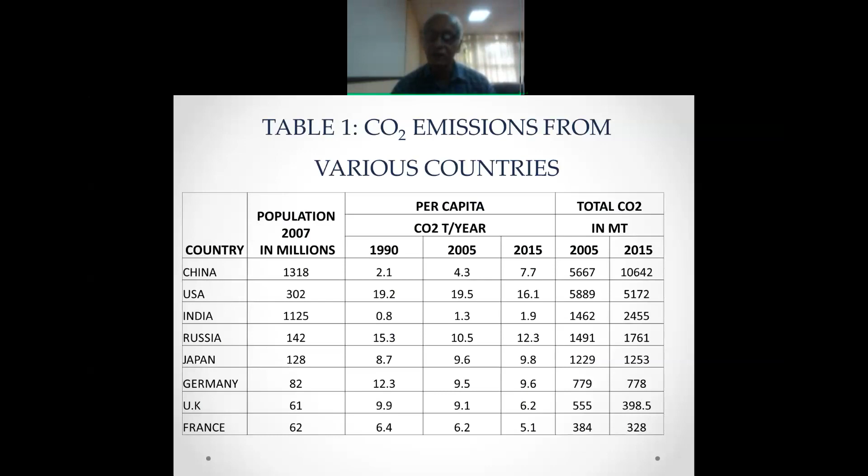Later on, after about 1989 or so, serious dissemination of the technologies developed by us was started by Dr. Yogananda, who was my student earlier. I will share what happened after the institute research in the second presentation. The first one is building alternatives for housing. I have a few slides about energy and carbon emission, which I shared the day before yesterday, so we will skip some of these.

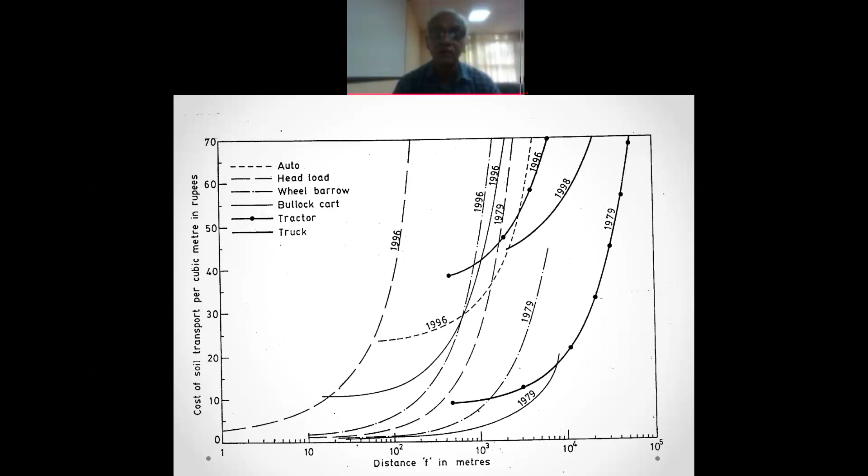India has carried out experiments in soil cement work since 1948. Surprising. In 48, in Karnal, it was then in Punjab, today it is in Haryana. 4,000 houses were built for refugees because these refugees came from Pakistan. Immediately they had to be housed. Bricks were not available. You see, brick production takes time. That was the season. In the rainy season, you don't get brick production. So they had to put up buildings.

And then the Building Research Division of Punjab was doing research both in Karnal and Lahore. And one Mr. Mehra, who was the research scientist, suggested we could use stabilized earth, rammed earth block walls. These walls are made out of ramming soil and cement mixtures, 2.5% cement. 4,000 houses were built. Even now, there are houses in which people have been living.

But the surprising fact is, after this, nobody took a second look at this technology. Maybe because of the use of mud. We were fascinated by concrete at that point in time, so mud was not considered very attractive. And the houses were given to refugees who had no other option. So to that extent, people didn't think much about this. And more or less, this was the end of this technology. You can say infant mortality of soil cement technology. Although we started 73 years back, we didn't improve upon it.

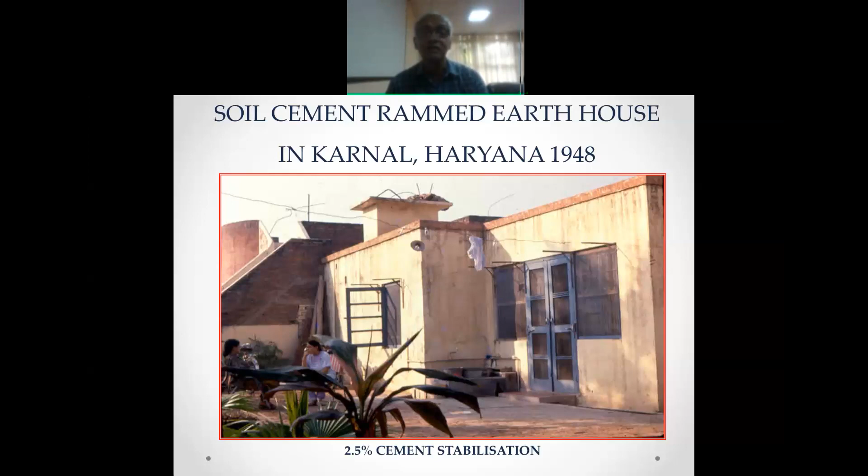Bangalore was also a pioneer. In 1949, there were stabilized mud block houses. 260 houses were built by an engineer by the name R. Madhavan. He made use of wooden moulds and hand rammed soil cement, 5% cement, to make blocks and then built walls out of this. Even now, there are 6 houses near Krishna Flour Mill.

The walls are not great. You can see a little bit of plastering at the base. Otherwise, there is no plastering. It is all whitewashed. And the 6 houses near Krishna Flour Mill are performing reasonably well, in spite of the fact that the blocks were not great. When I tested some of the blocks out of some buildings which were removed, the strength was pretty low. But this was also an experiment which did not excite interest among the engineers.

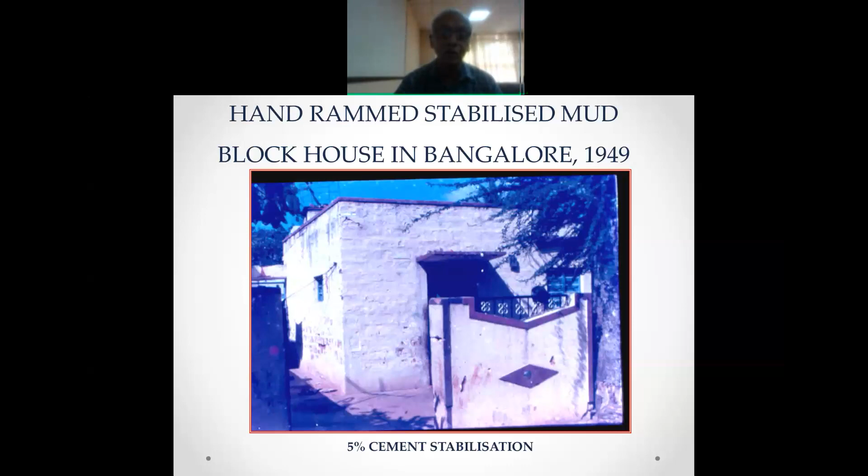And Mr. R. Madhavan, his name has been given to a park in Jayanagar, so that you can forget about what he has done. Like we forget about Gandhi by putting his picture on all the notes, and then we do not follow what he said.

Later on, we built one building using a machine called CINVA-Ram, which was imported from Colombia. And we designed our own machine, known as the Astram, in 1979. We were demonstrating this in a rural area in a village called Ungra. It's myself there along with the joint director, Dr. Ram Sheshan, and my younger colleagues, Venkatram Reddy, are all here. He has now retired.

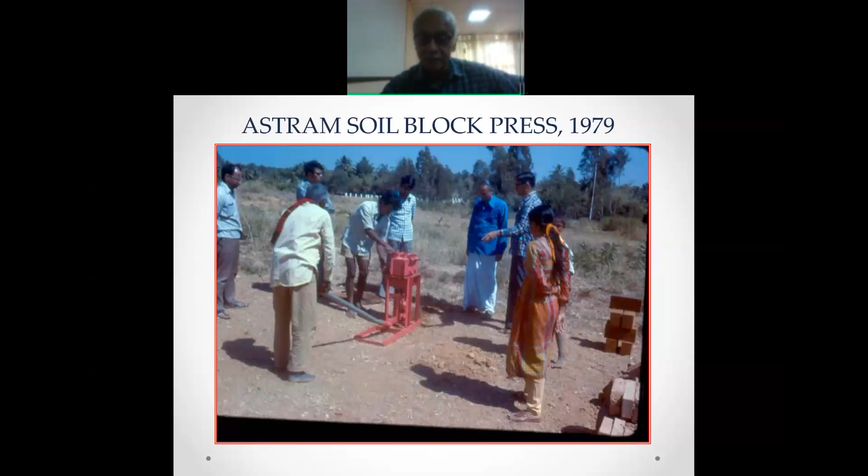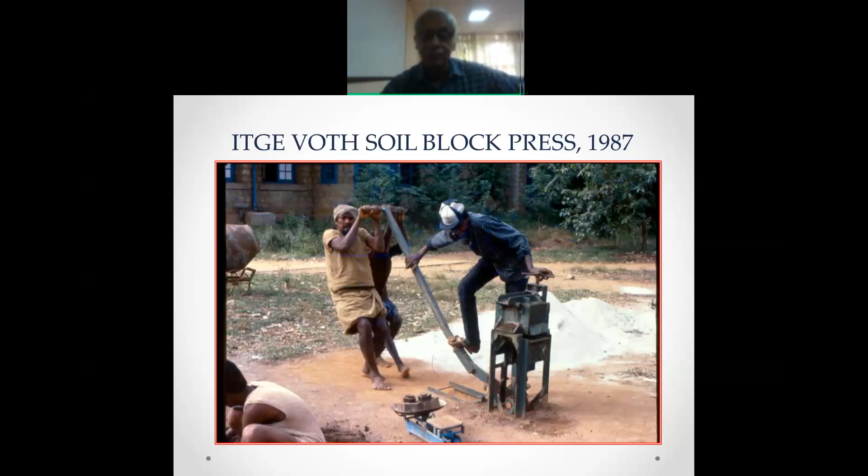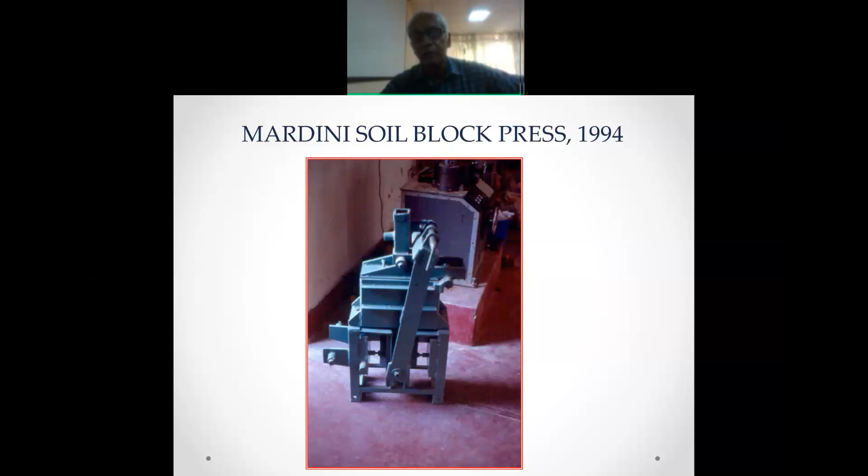This is the latest machine, 94, developed, the Mardini soil block press. And this is now currently manufactured by a company called Mahimaya. And more than 1,000 machines have been produced and sold all over India and even in countries abroad.

In 2018, all the other machines were manual. A human being had to press the block using a toggle lever, a compound lever. But we also developed a mechanized press using hydraulic press, electrically operated. This was developed by Yogananda and his associate Arvind.

Because very often these days people find the pressing using the toggle lever a little tiresome. Many people would prefer to use a machine, and we also try to develop such machines. They are a little more costly and they need the use of electricity. There are advantages and disadvantages. The manual machine could be used anywhere where you do not have electricity, and it generates employment.

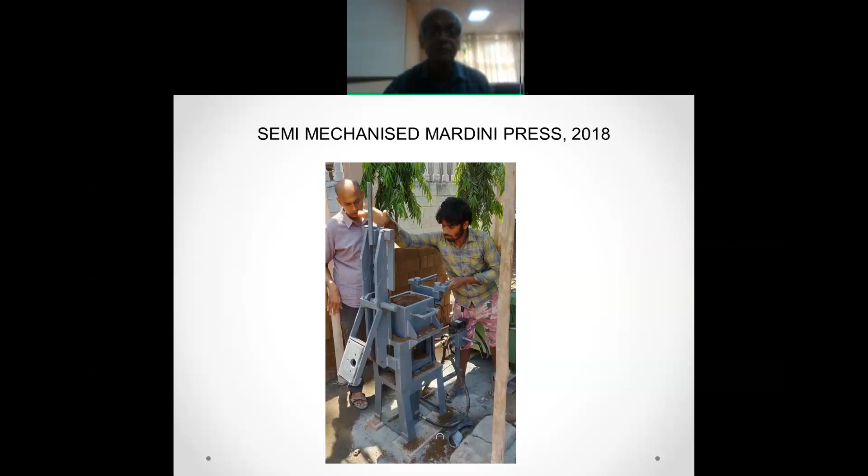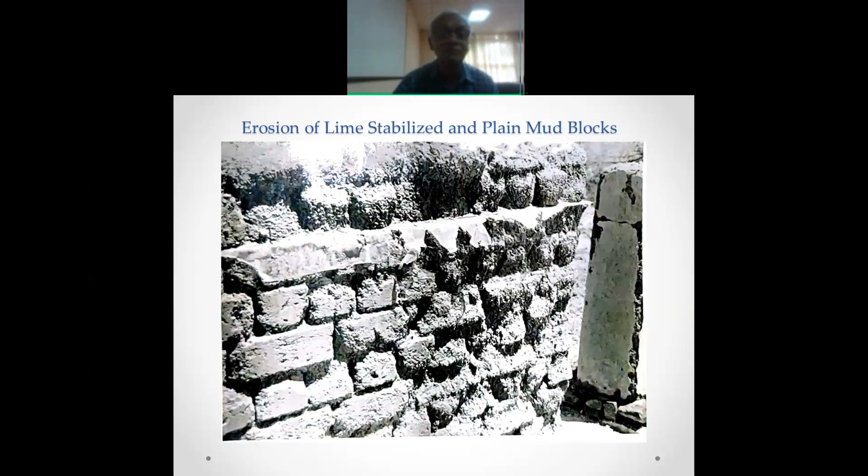Now, I was unhappy with the tar coating I had given because the whitewash would wash away and the building was looking very ugly. So I decided I must correct this mistake. I removed the tar completely and invented a cheap local plaster.

Every step we have to innovate. We have to do something where we want to use a local material, we want to save cost. So I used a plaster known as lime soil plaster.

You see, lime mortar would be very expensive. I could have used lime mortar - I know it would have worked again. But lime mortar is a 1:2 mortar, and lime is more expensive than cement. So the lime mortar would be unworkable.

But I added lime to soil and sand. It was probably a 1:3:3 kind of mixture, so lime is only 1/6. So the cost of lime doesn't figure much. And I used this as a plaster.

And you may ask me, why did I use soil? See, when you use soil in the plaster, its ability to adhere to plain mud is improved. So we want the plaster to adhere to plain mud. Cement mortar would not adhere because the properties are so different.

So I invented this cheap local plaster and covered the wall with it after removing the tar. But this plaster was very weak. It would also absorb moisture because it's a 1:6 mortar. So I had to prevent moisture absorption.

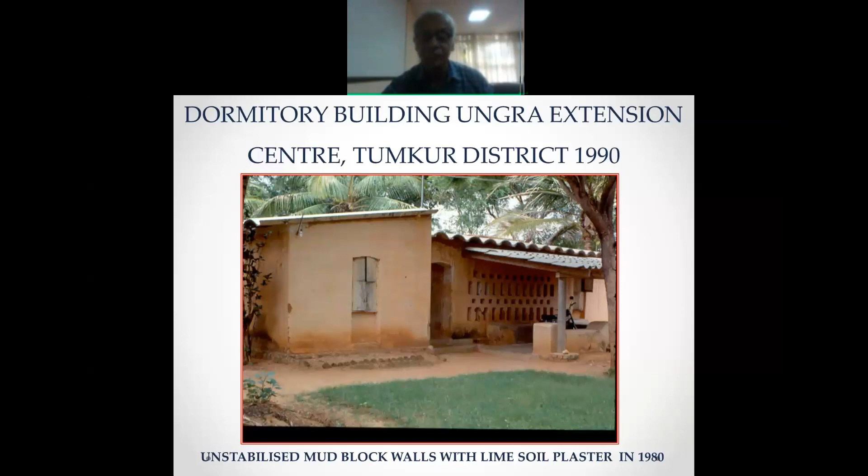We made another experiment because adding a stabilizer would increase the cost greatly. So we wondered, what happens if you make a block with only one portion having this stabilizer? We had lime surki, the local material - brick powder and lime - as lime surki was added.

Our machine was very convenient. We had a separator plate, put stabilized soil on one side and plain mud on the other, and then compacted after removing the plate. Now we have a built-in plaster for the block - it is a block which comes with the plaster. And because of the compaction, the two are held together under great pressure.

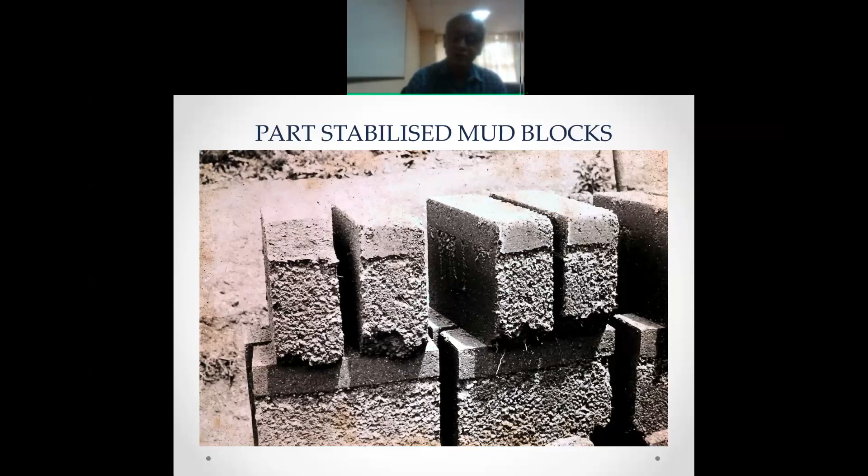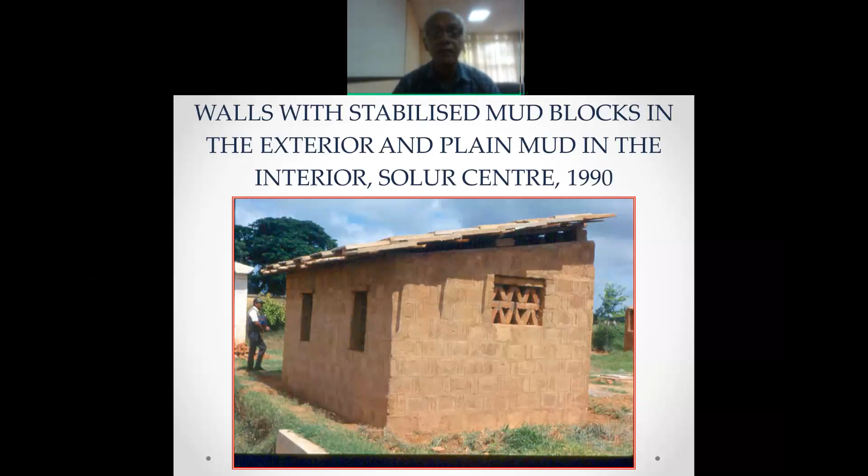So the partner of this paper mill was Mr. Kumangada; my brother was the other partner, and he would not believe in whatever I was doing. But his partner felt this was a good solution, so he got 4 machines made. These 4 machines were deployed there, used the local soil, and made soil cement blocks for the entire paper factory. I suggested the use of 8% cement because I did not know what would happen in an area where the quality control is not clear.

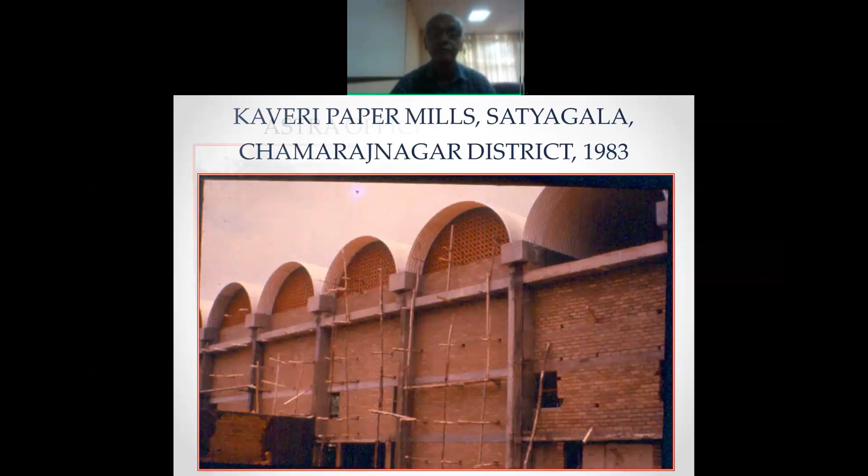And then we had a jack arch roof, a modern version of the jack arch. The traditional jack arch uses a steel girder, but I didn't want to use a steel girder which is so expensive and energy intensive. We made precast concrete, reinforced concrete beams, lifted them and kept them across the walls. Then these arches were made out of weatherproof tiles, 2-inch thick, cast on the ground with GI wire as reinforcement, then lifted and kept. So it's a prefab jack arch terrace.

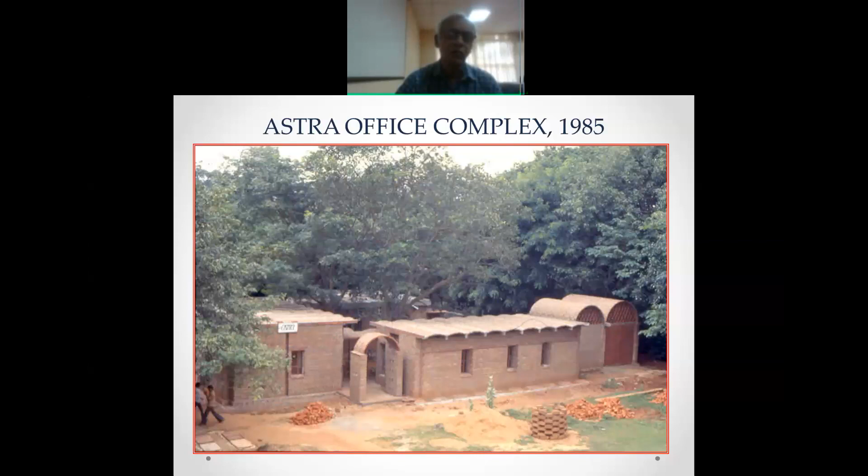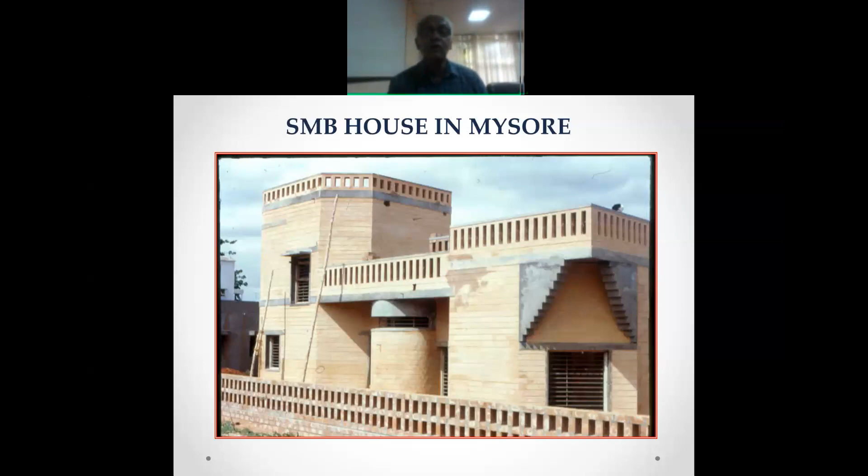This is a house in Mysore, exposed soil cement block work. You can see the variety of experimentation which architects do to display the new material in exposed block work.

In '97, I was living in a single-storied house with one staircase room. My daughter got married and she was living in a rented house. I was wondering, why don't I build my first floor so that my daughter need not stay in rented accommodation? And I could also correct the fact that I was living in a brick house and recommending soil cement. My house was built in '72 when I did not know anything about buildings. All my research started in '75 onwards. And when I built my first floor, I used the soil cement block machines developed by me.

And you notice there is a reddish colored powder here. For this reddish colored powder, I had to remove the surki concrete on the roof. It's about a 4 to 5 inch layer. It had to be removed. When I removed it, a lot of powdery material came, which contains old surki, old lime, sand, everything. So I thought I should use this. And I added this to cement mortar.

You see, I am adding mud, something else to cement mortar to make it better. Because cement mortar sets so fast. You need a mortar which sets slowly. And we added this material which contains surki and old lime, and the mortar setting time increases. You can see the pinkish color of the mortar. So all the waste from the demolished surki concrete was reused. It's an indication of how you can use a demolished building in recycling materials.

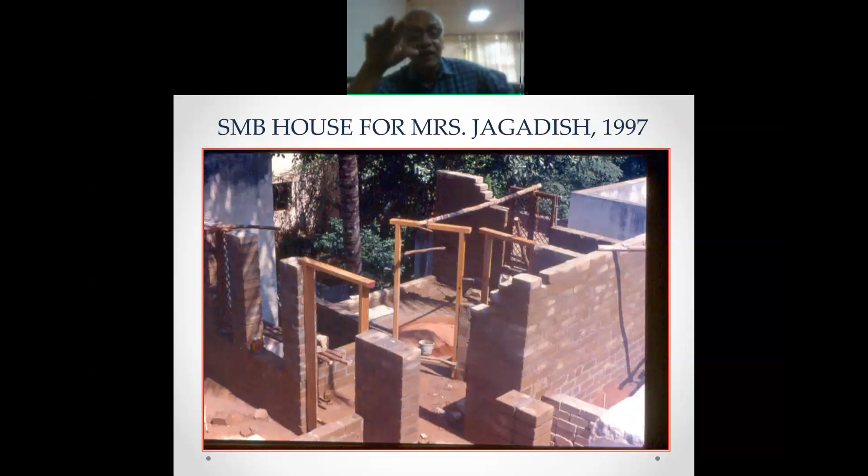And another interesting thing here is we had 4 wall thicknesses in this building: 9 inches, 7.5 inches, 6 inches, and 4 inches. You can vary the wall thickness, which will again lead to better economy.

There was also a major failure. This was the failure in Yelahanka, 1992. The picture was taken in '92, but the problem started showing much earlier. HUDCO was very enthusiastic. After conducting 2 seminars, they said, let us build 700 houses. They wanted to promote the new technology. And they asked the Karnataka Housing Board to build 700 houses in soil cement.

And then I'm not sure how well they compacted the blocks. The machine was also their own copy. And the result is the walls started deteriorating. The kind of experience we had earlier in our office building in '85 was reproduced here because they did not consult us. They more or less stole the technology, picked it up from the streets. There are half-baked consultants.

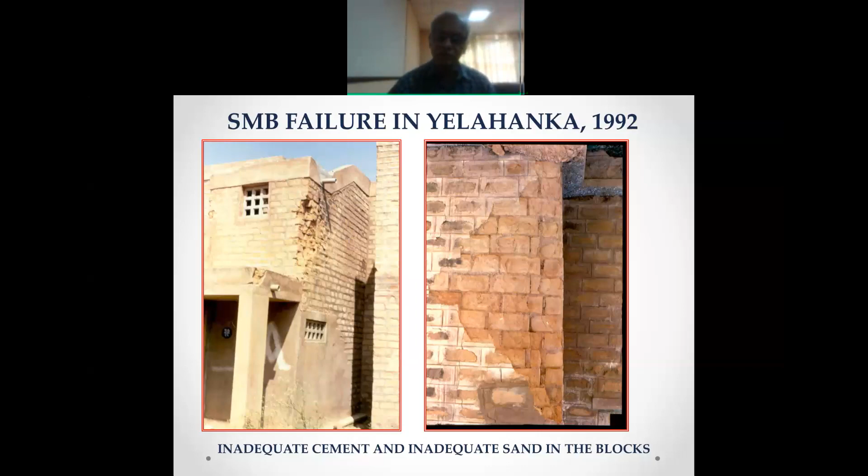The unfortunate part is our engineers do not try to think or try to understand any technology. In fact, the National Housing Bank chairman, Mr. Shastri, who gave us support, told me that government should never build houses. Government building houses is a problem. When the private sector builds, you will find that the houses are excellent. This is a 3-story building in Krishnarajapura, using soil cement blocks, using vaulted roofs, everything possible. No problem with their performance.

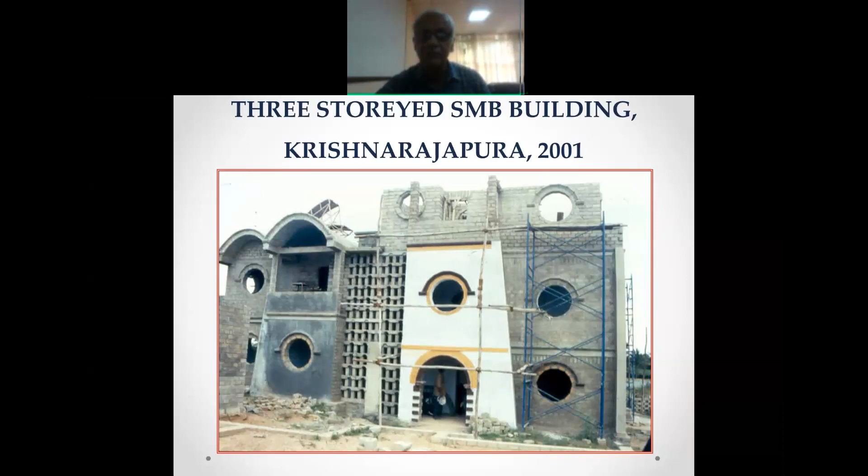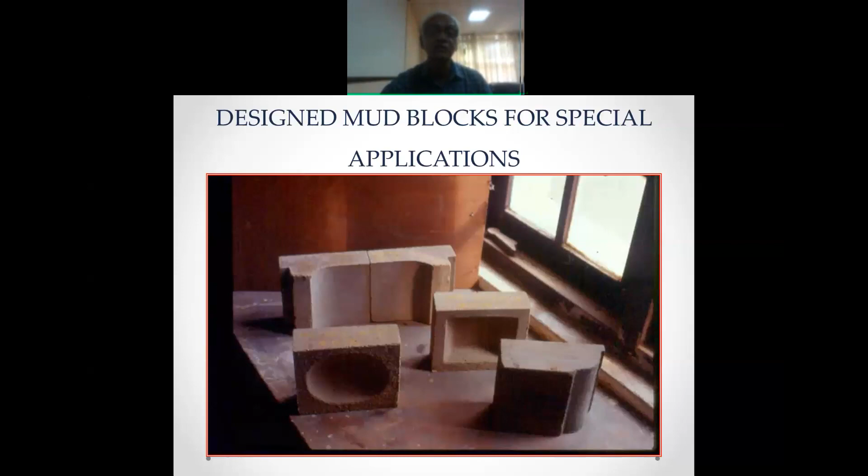You can use blocks of different shapes. The machine has the advantage. You can use this as a decorative block or a corbel. These are blocks used in filler slab roofs with a reduced thickness. So all possible, we did corner rounding earlier. So this technology has tremendous potential in expressing architecturally different forms.

Now, Subhash Basu, an architect who's working with me, and Yogananda came up with a new concept called stabilized adobe. Here, no machine is used. See, the problem with the machine is it is costly and it requires a lot of effort to compact the block. Here, we have a technique using the more or less traditional technique of adobe. Adobe is an unburned brick, but in producing adobe, we do what is known as pugging. Even for burnt brick, the soil has to be pugged. Pugging is stamping on the soil in the presence of moisture so that the clay coats all the other particles and becomes very homogeneous. We did this with a stabilized soil cement mixture. So this was pugged, and then using a special mold whose bottom plate can be removed, we made the adobe blocks of stabilized soil.

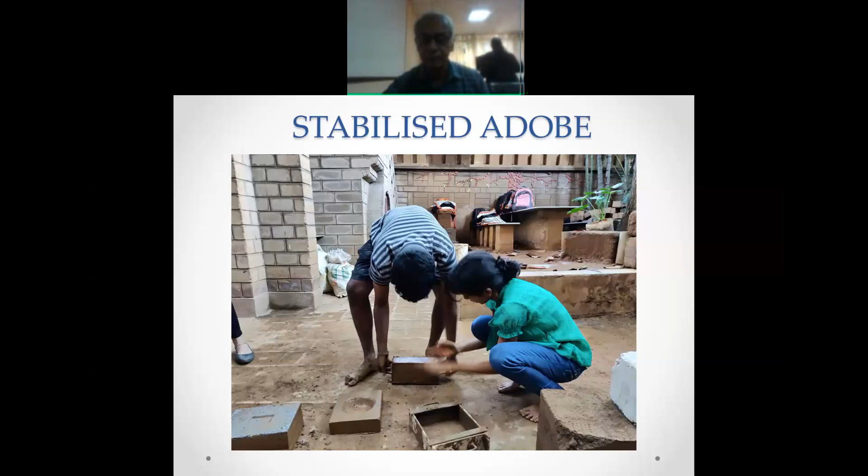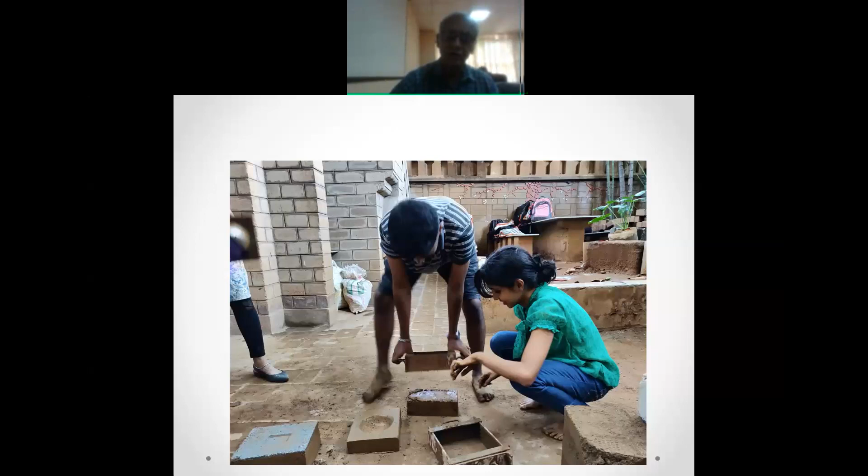And because of the bottom plate which can be removed, it is very easy to extract them. In this technique, the bottom plate is lying on the block, but the mold has been removed. This way, the shape of the block is very good. So, using this technique, we find that it is very easy; in rural areas, people are used to making adobe. They can use the same adobe technology with soil cement and produce blocks for their use. And they can do it after the harvesting. They can make some blocks and keep them apart. In rain, they won't dissolve because of the cement. They can build whenever it's convenient. A fantastic version of soil cement technology, stabilized adobe. Already there have been many houses built using this concept.

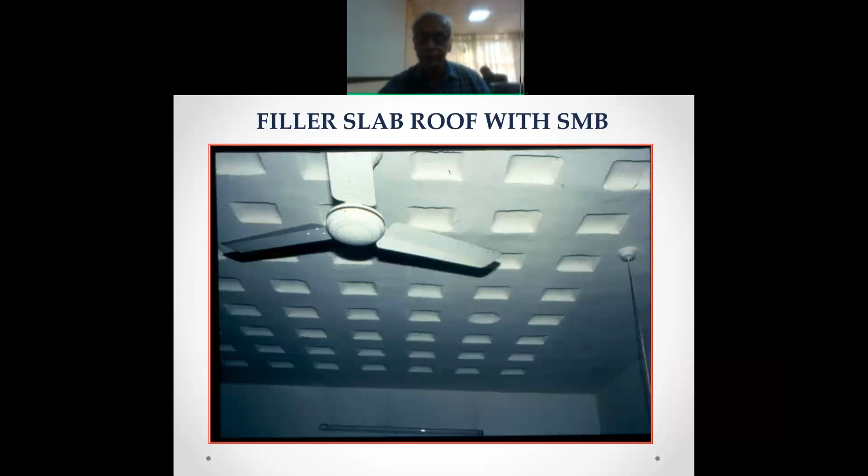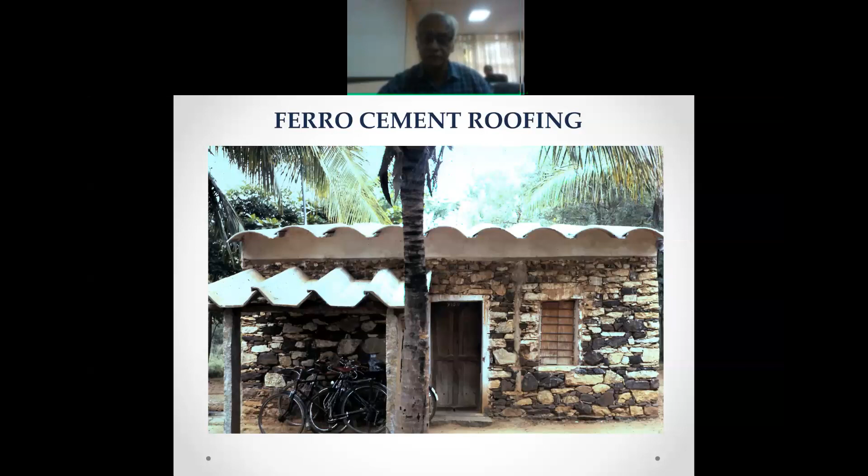After 7 years, I thought the top portion had gone. It appeared deteriorating, but when I tried to remove it, I found the interior was intact. Probably it would have lasted another 4 or 5 years. An interesting solution. Thatch is a cheap material. If you can make it last longer, if it can last 10 to 12 years, so many temporary buildings, roadside dhabas, everywhere, you can save money by using this technology.

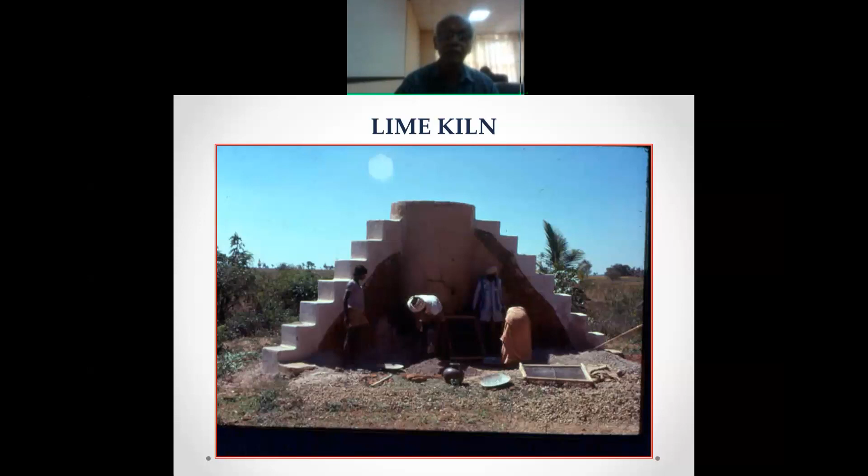It has tremendous possibilities. I showed how the wall can become erosion resistant if they add some amount of lime. And you can use this for plastering. So many possibilities with lime. Lime alone may not give a great deal of strength, but lime, if it is mixed with pozzolana... KRS Dam was built with lime pozzolana mortar. They made pozzolana by burning clay at the site.

Clay burning is a method, but here is an interesting innovation. We used rice husk to burn the clay and made a special kiln with holes in the brickwork because the temperature of burning had to be brought down. If you burn rice husk at a high temperature, it won't be pozzolanic. If you burn it at a temperature below 700, the ash becomes pozzolanic. And burnt clay is also pozzolanic. We produce what is called combination pozzolana.

We make briquettes with rice husk and clay, burn them here because the rice husk is the fuel, and then you grind it to 90 micron fineness. You have an excellent pozzolana produced in the village. In fact, once we produced lime pozzolana cement in the village and sold it to villagers for a few months. Then somebody wanted to improve upon it and pursue it further. It's a great potential even now.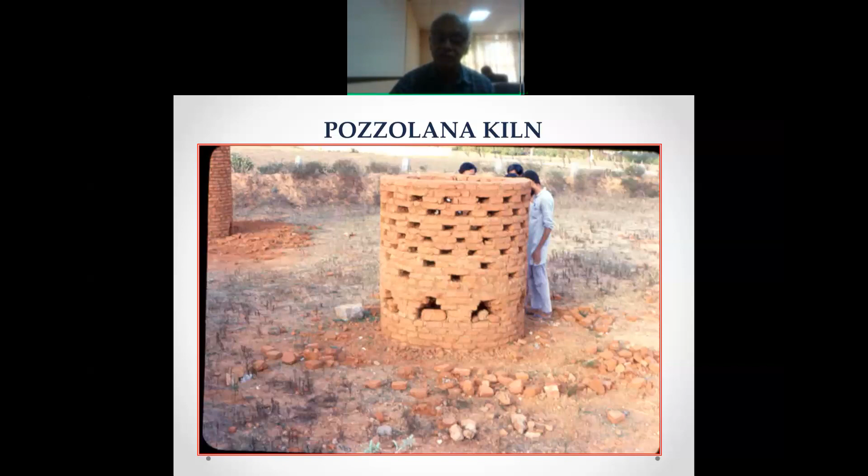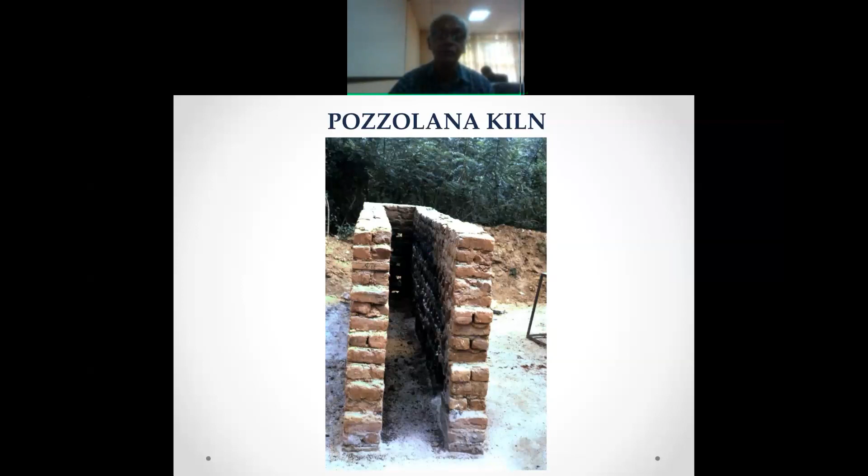If you can produce this in the villages... today people are using GGBS as pozzolana. You produce the equivalent of GGBS in the village itself, where rice husk is a local material and clay is a local material. This technology remains to be explored for the benefit of villages. This is another pozzolana kiln where you have a narrow, long kind of thing where rice husk can be burnt.

I talked to you about lime soil plastering, which I did for the building. Here we did this for several rural buildings, mud buildings. Mud buildings' life can be extended by providing a lime soil plaster. Here is lime soil plaster. Here, over the lime soil plaster, we have done the lime surki coat, lime wash to make it a layer of calcium carbonate. We did this for several houses.

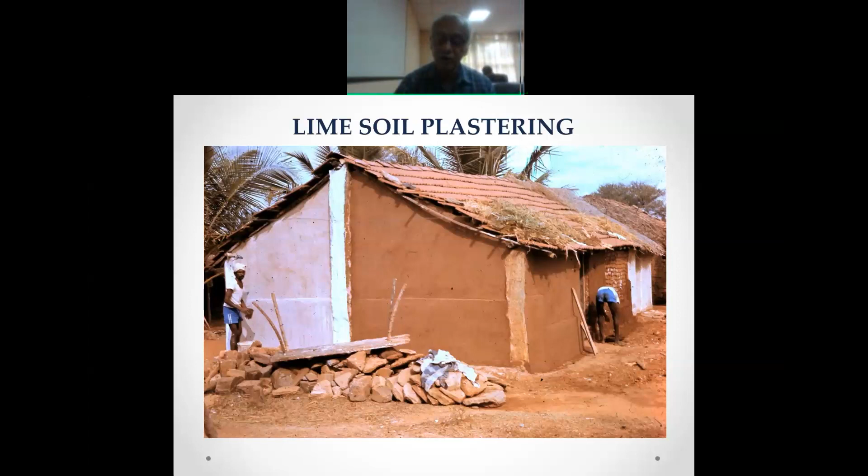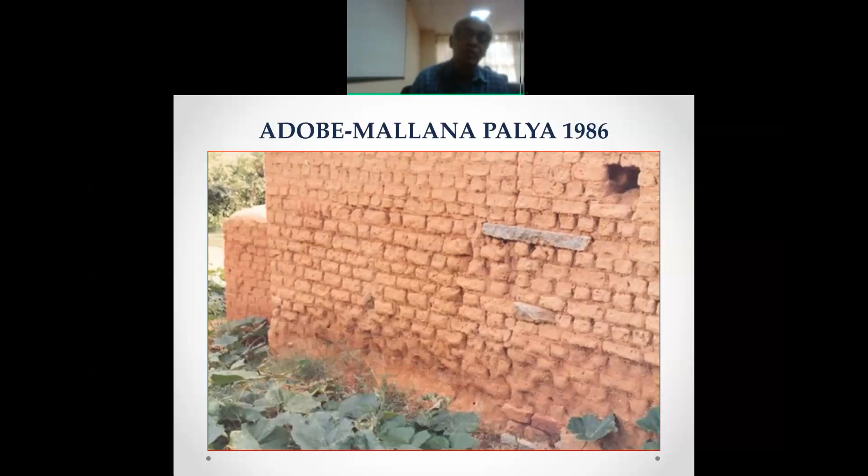Lastly, I would like to look at Adobe. Adobe is unburned brick, and it has been used extensively in older buildings. I started looking at it a little more seriously. And here is a building in Mallana Palya; I took the photograph in '86. These bricks are normal brick size, but you notice the damage at the base. These are not very good Adobe bricks. Probably they were not processed properly. But look at this sliced Adobe. It must have been made about 100 years ago.

And this is used in a different method. This is known as sliced Adobe. We call it in Kannada kudlu itige. Kudlu is a sickle. You spread a layer of wet soil, pugged soil, on the ground, like a cake, a thin 4-inch thick layer.

Take a sickle and draw lines along this, like cutting burfi or Mysore pak. Once you leave these marks, it will dry up into several blocks. A very simple method of making Adobe. And in this Adobe, you notice the bottommost block is very good. It has shown no erosion.

I don't know what they did, whether the clay's proportion was right or whether they added jaggery or something like that. It has performed absolutely well for more than 100 years. So it shows adobe has a lot of potential. I showed how a plain mud block can be protected by a mortar and a waterproof coating.

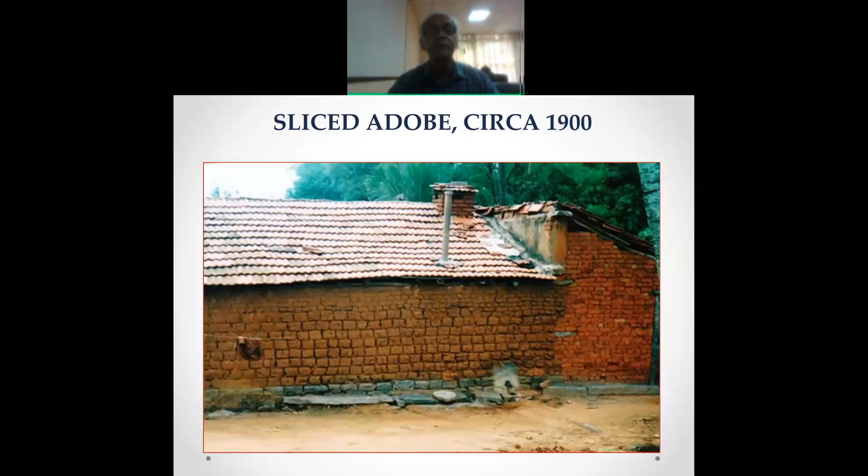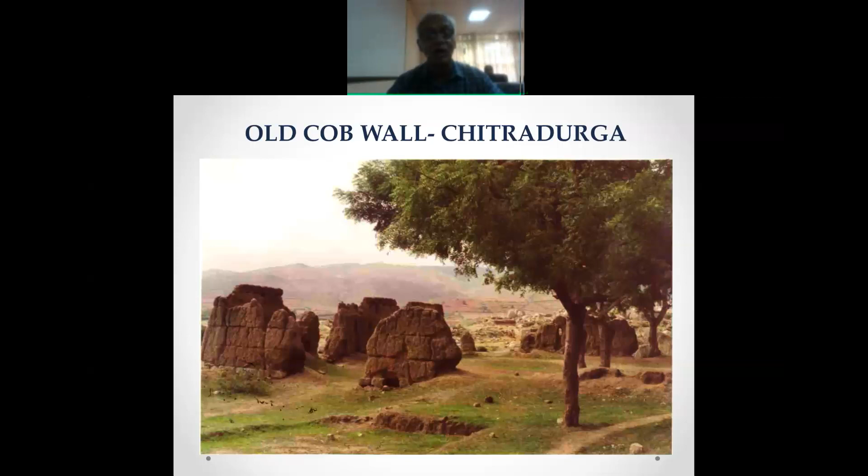Here are old cob walls in Chitradurga, the 200-year-old walls. Again, I do not know what they did, how they processed. These walls are lying in sun and rain and they haven't collapsed. These are the mud palace walls of Chitradurga. They are very interesting adobe. It looks like a hemisphere. Each block must have been made by hand. They are still remaining without erosion.

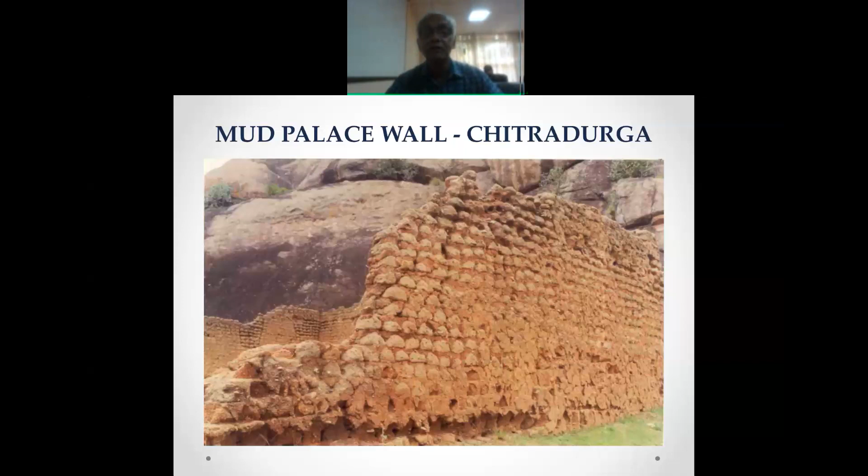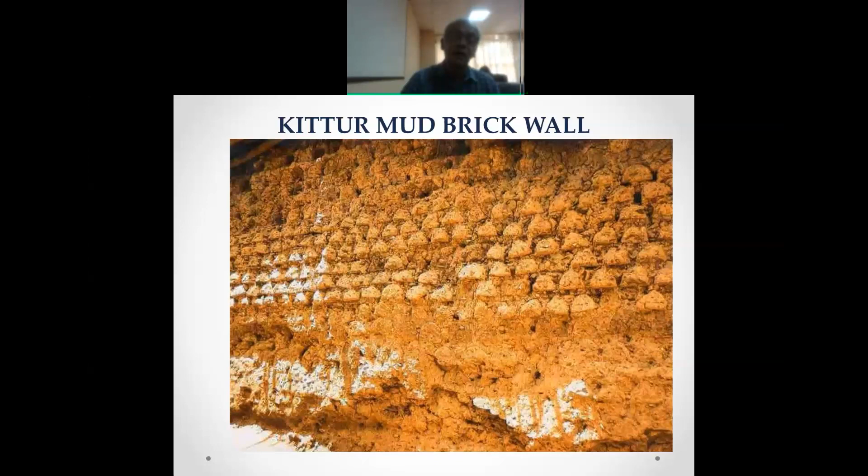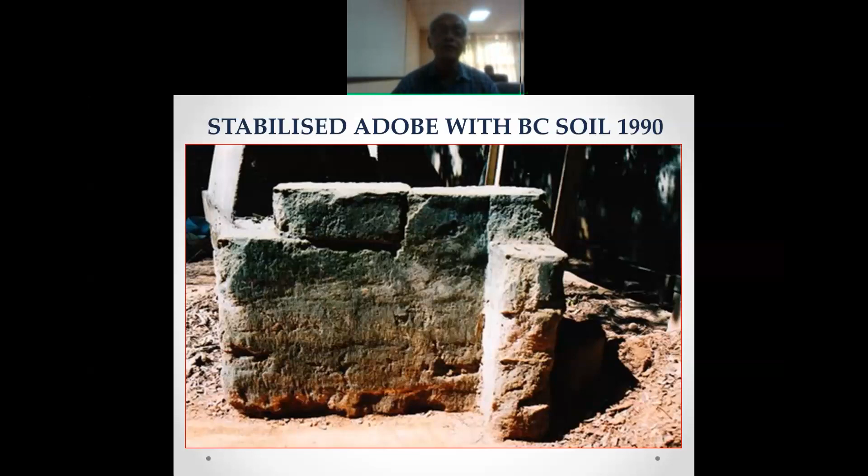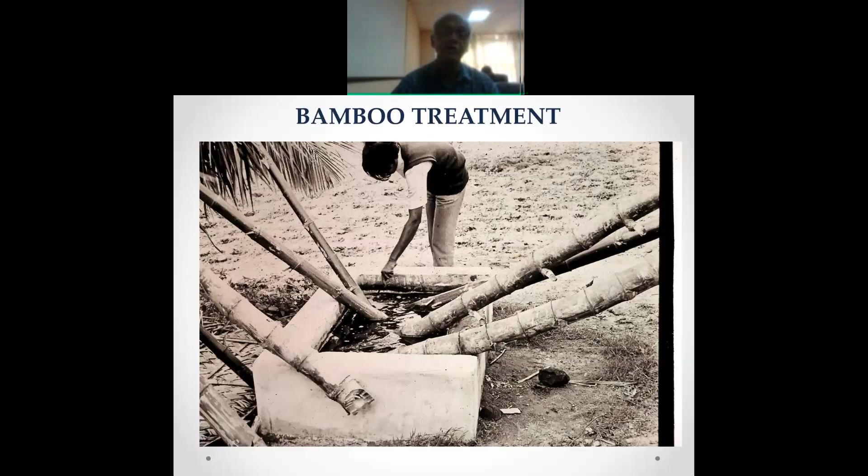We also did some bamboo treatment. It was not very successful. Bamboo is something which has to be looked at more seriously because it can be a very good local resource. I think I have more or less covered this portion. This is the result of all the experiments I did through the institute.

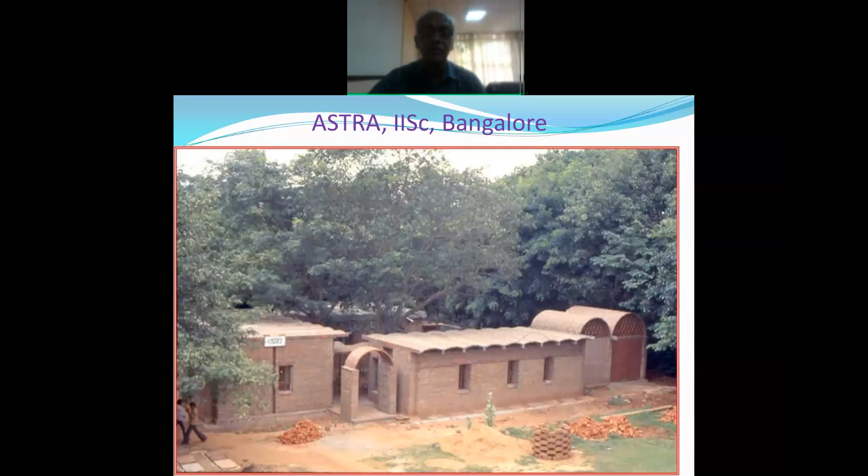So with this team, this is of course the first building of ASTRA. Dr. Yogananda was involved in the structural design of this building. The Mardini soil block press, which is marketed by him. This is the Mrinmayi Center. First, he built a 3-storied building using mud blocks. All his office has been built out of mud blocks. See, his staircase. Staircase is also made out of masonry, no concrete. So it shows the versatility of masonry.

These are some of the residences he has been building. Very attractive, architecturally sound kind of buildings. And people came forward. When somebody sees this house, somebody else says he wants a house like this. There is no plastering externally. People got used to the exposed block work. Interior of a residence, again exposed block work, no plastering. So you save on the plaster, vaulted roof. People have been fascinated by this kind of treatment.

Another house, basement plus 2 floors. So load-bearing masonry being continued. First 4-storied building in masonry, no columns. They built it in Padmanabhanagar or Banashankari somewhere there, 4 stories. They have built several 4-storied buildings. Only for the floor you use concrete or filler slab, sometimes shallow domes for the floor, or jack arch terrace, all these possibilities. Masonry is making inroads everywhere.

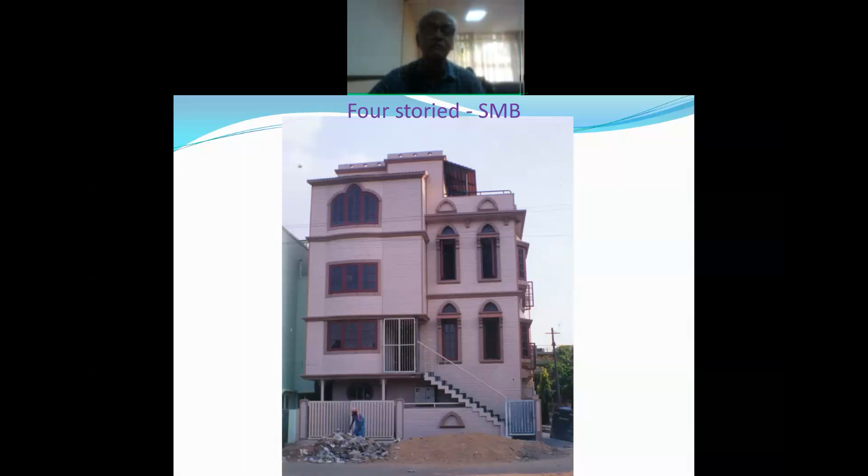Farmhouse in Bangalore, interior of farmhouse, RC frame structure with SMB walls. In fact, the Shanti Park apartments in Bangalore, the entire apartment block was built using mud blocks. In fact, they had the advantage that when digging for the foundation, they had so much soil. All the soil was converted to blocks there itself. So you don't waste on transport. So quite a few apartments were built like this.

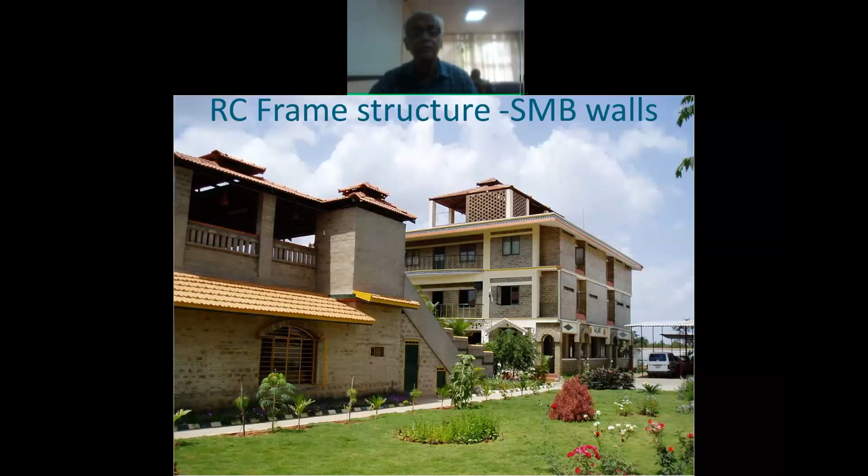But subsequently, the apartment builders were so busy with so many details, they did not want to get into the block making activity. RC framed structure for the Rajiv Gandhi Housing Corporation. Masonry walls. Tamil Nadu: Dr. Yogananda and his friend Anuradha and Krishna, they were in Tamil Nadu. So they started interacting with Yogananda, and dissemination activities started in Tamil Nadu.

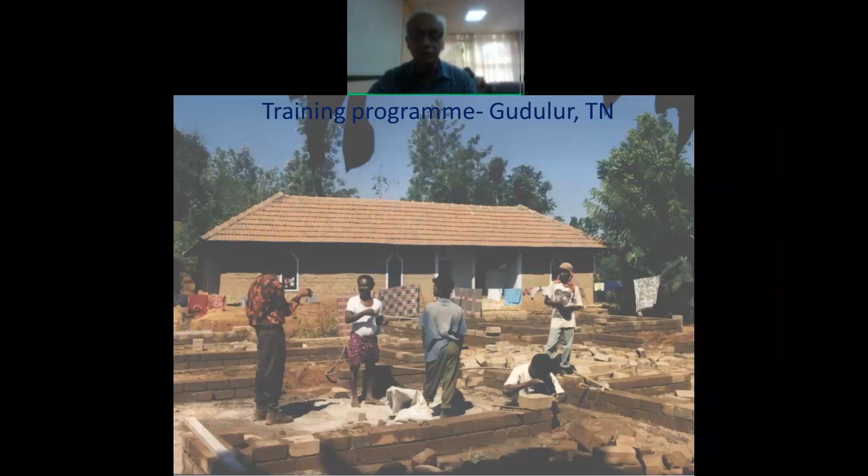Gudalur in Tamil Nadu. A training program is going on. They used soil cement blocks, soil lime cement blocks. Tribal housing in Gudalur. Tribal housing, another in Gudalur. Doctor's residence. Hospital building in Gudalur. Interior of hospital building. Residence in Gudalur.

Anuradha and Krishna moved to Sittilingi in Tamil Nadu, in Dharmapuri district. There again, more houses were built. Tamil Nadu has the practice of using country tiles, a four country tile layer. So that has been worked out here. Chennai residence.

Bricks India in Sholingore uses a lot of our technologies. Yogananda was again a consultant. Krishna and Anuradha were architects for the school building in Sholingore.

They were using foundry waste in Sholingore, and using foundry waste we showed how blocks can be made. In fact, one school building has been built using foundry waste.

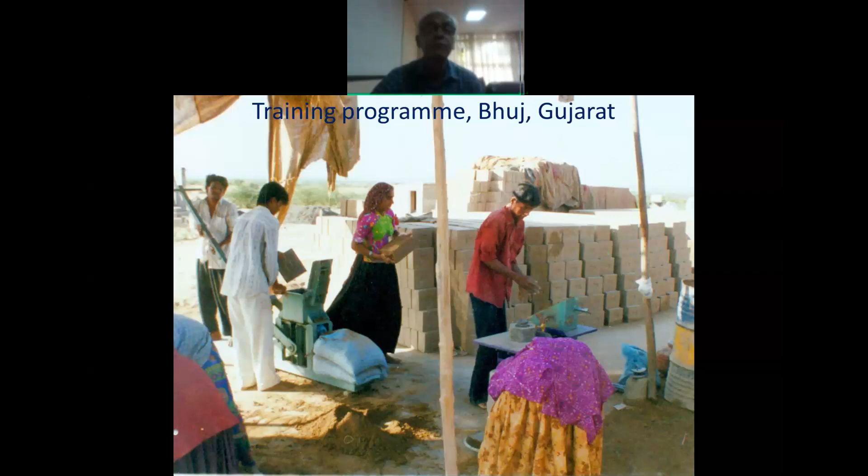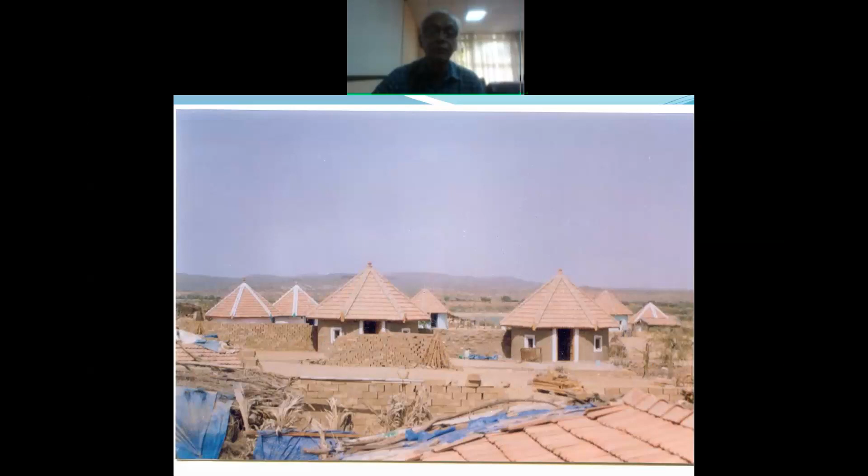Bhungas are circular buildings used by tribals in Kutch, and one block could be used again to make them. Residences in Bhuj.

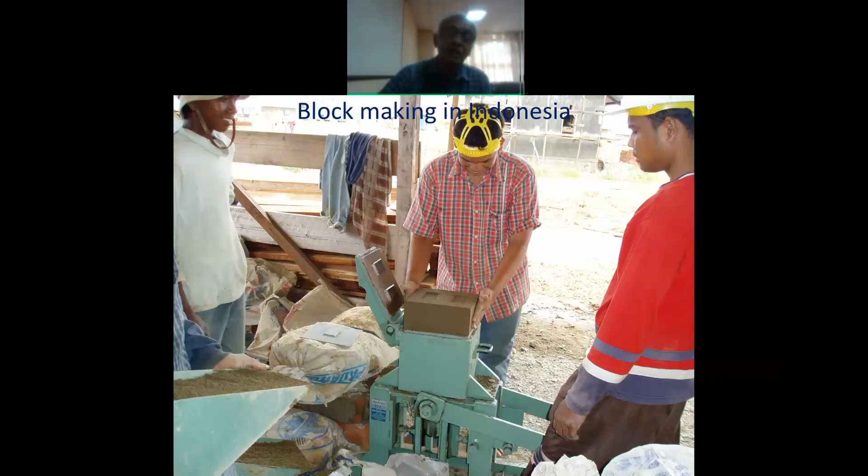Block making in Indonesia. After the tsunami, the Hunnarshala group was interacting with people in Indonesia for housing, and Yogananda supplied the Mardini machines. Hunnarshala participated in demonstrating mud blocks in Indonesia. Residence in Indonesia.

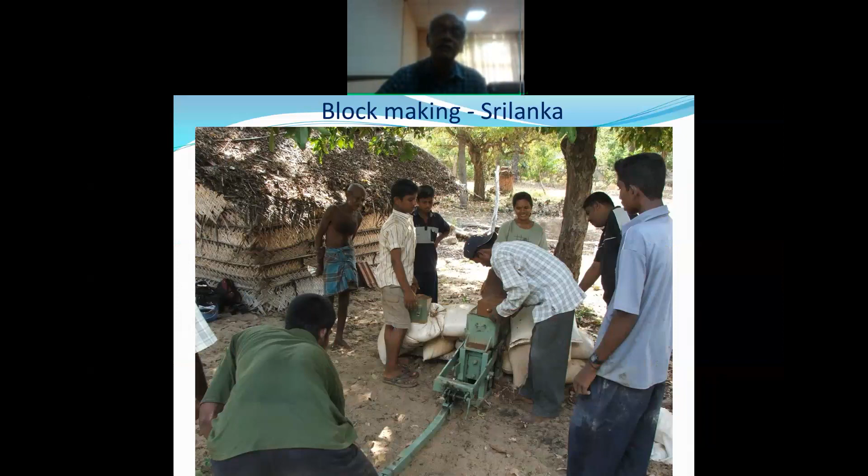Sri Lanka, again after the tsunami, one building was built. This is Kanikraj, who is a person associated with Yogananda, demonstrating the building in Sri Lanka.

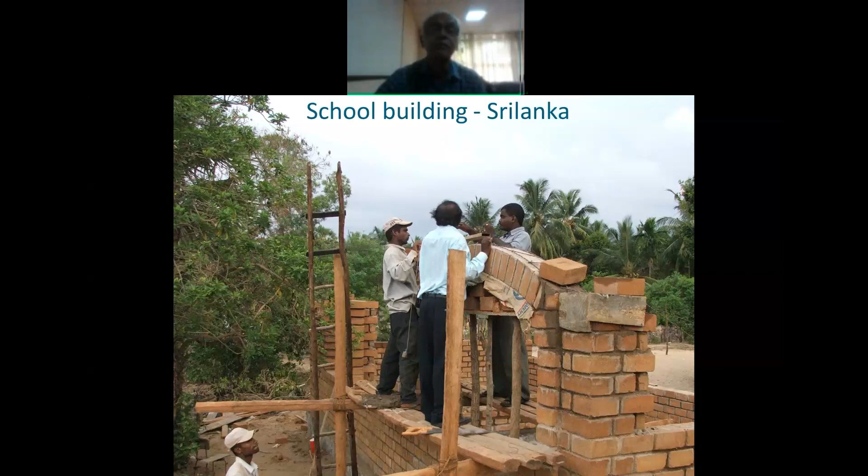Afghanistan. One Raghuram, who was working with me earlier, became a freelance consultant, and he was involved in spreading this technology in Afghanistan.

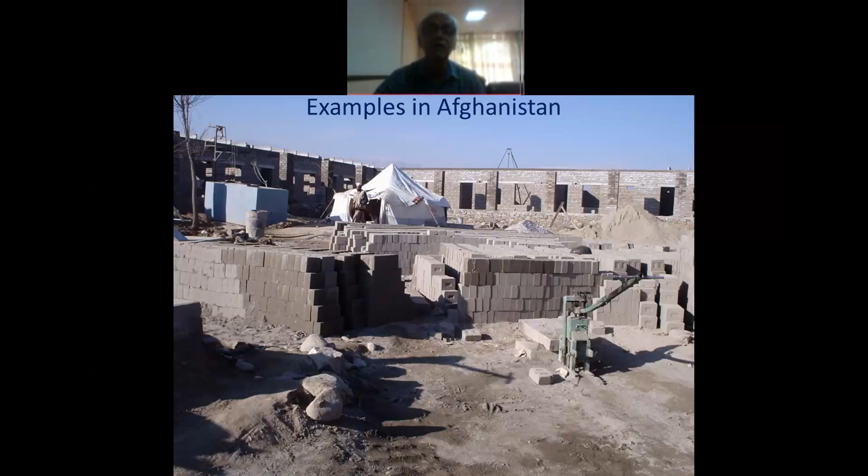Rammed earth is another technique. Instead of making a block, you use molds to ram soil and cement mixtures. It's a well-known technology used in France, used in China, used in Himachal Pradesh.

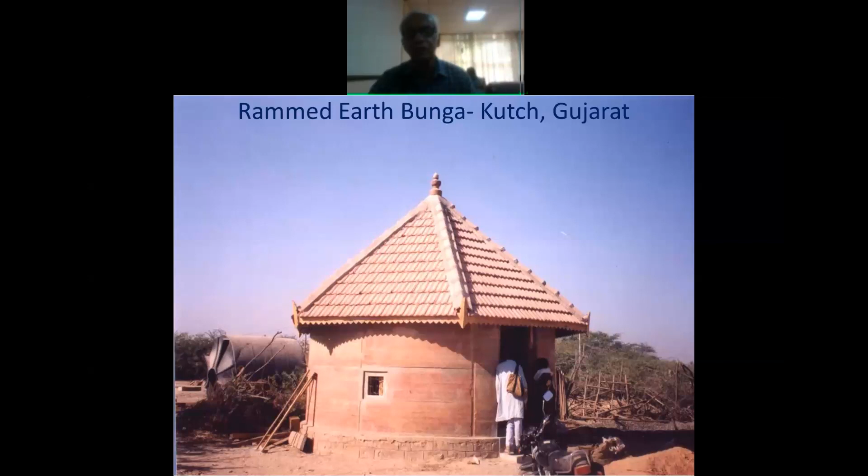Bhungas using rammed earth. Rammed earth residences in Bhuj. These are earthquake-resistant bands.

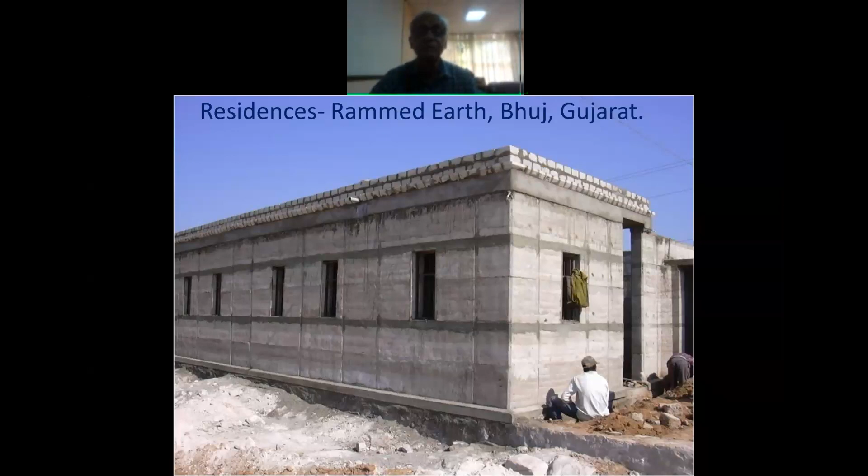Rammed earth residence in Bhuj, Gujarat. Here you make rammed earth for a large block, built in situ with joints.

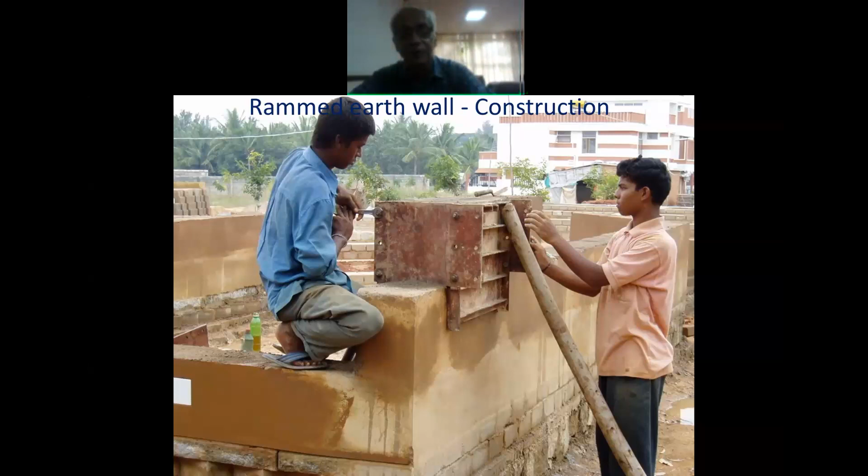This is a machine, a mold developed by Yogananda, showing how we use it in rammed earth construction. A wall which is already built, you keep the mold above and compact the soil manually. This is the finished rammed earth wall. Many people like this kind of finish.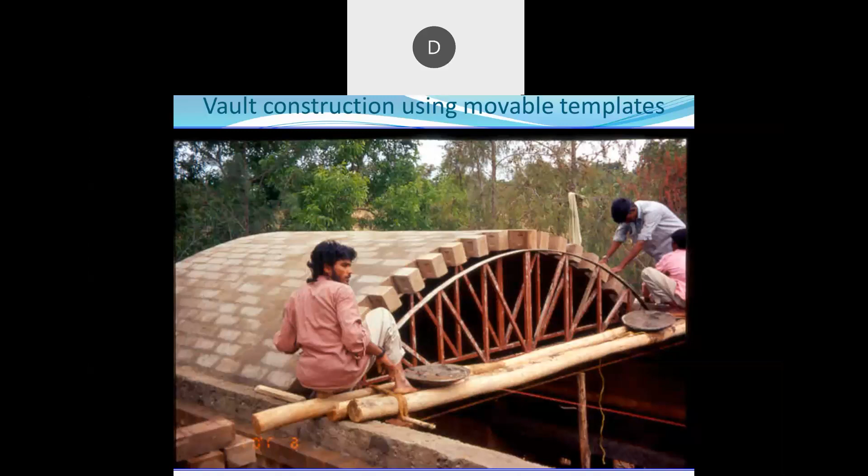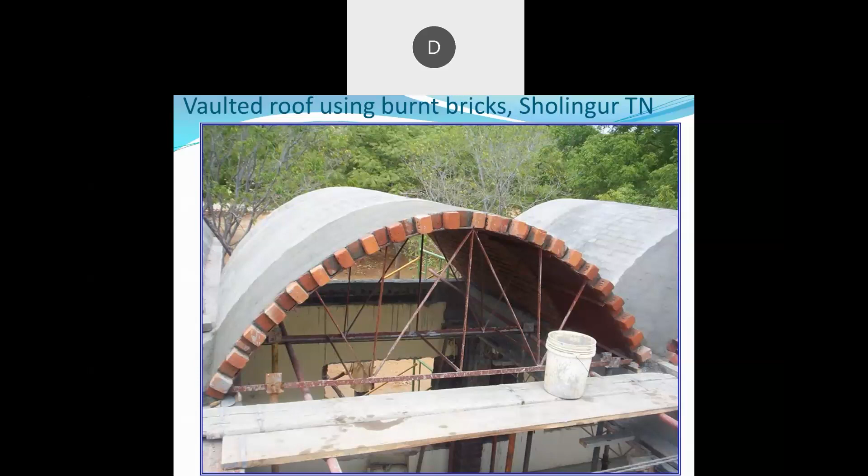With the two templates in place, one is removed and kept here to continue the roof. This is another method where you have a mold, the trussed support of this width. Every time you build this width, and once this is over, after giving some gap of time, you move this further.

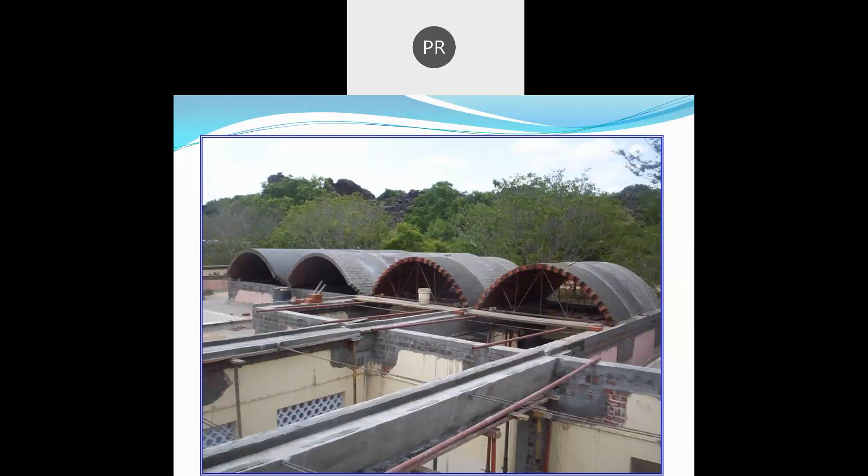These are brick vaults for a school in Sholingur. A dome, 32-foot diameter, in Mangalore.

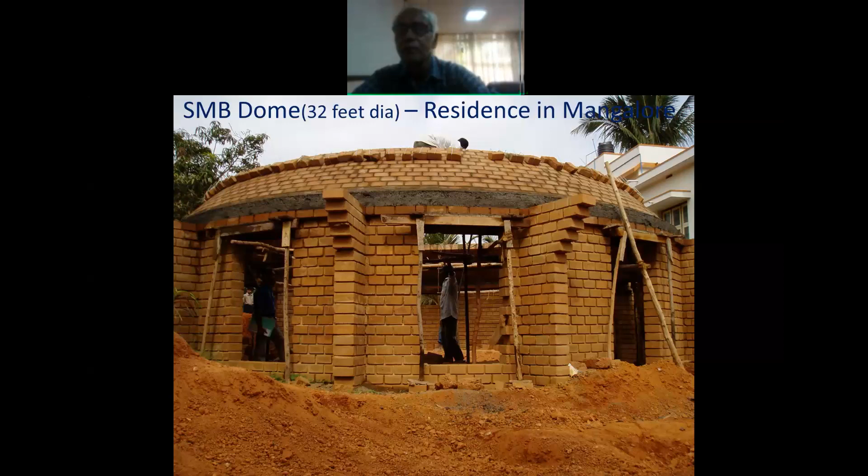The dome construction can be done without formwork, a spherical dome, because you have a rod which defines the position of a block to be kept. The fresh block which is kept with mortar may slip away, so you put weights to keep the block in position till the mortar hardens. Once the mortar hardens, after about an hour or so, you can remove these weights.

Since the radius is so large, you dig the ground to start the rod here, so this defines how the block has to be kept. This is all the detail for making a spherical dome.

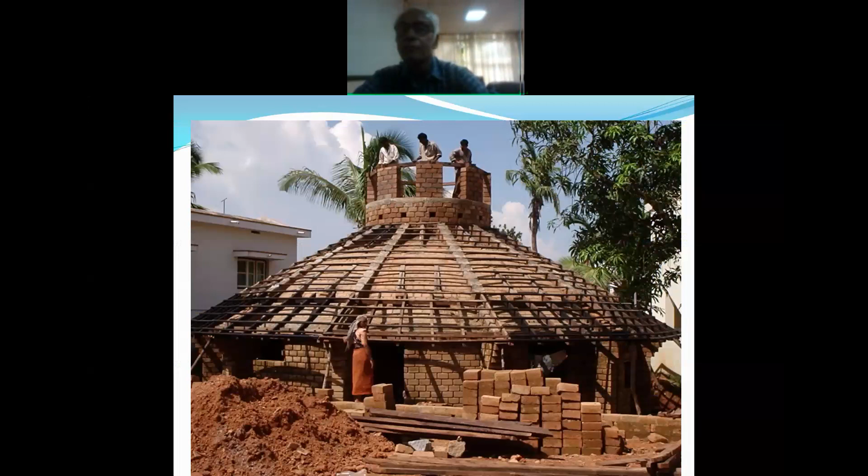Spherical dome, there are now tiles to avoid problems of water leakage. Mangalore had heavy rainfall, so they decided to do a two-layer roof with the mangalore tile covering. There was some detailing here, and the mangalore tile has been covered in the spherical dome.

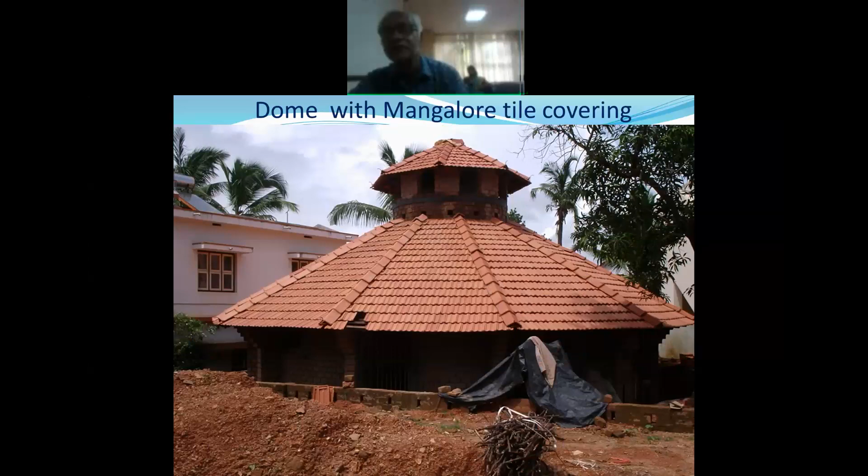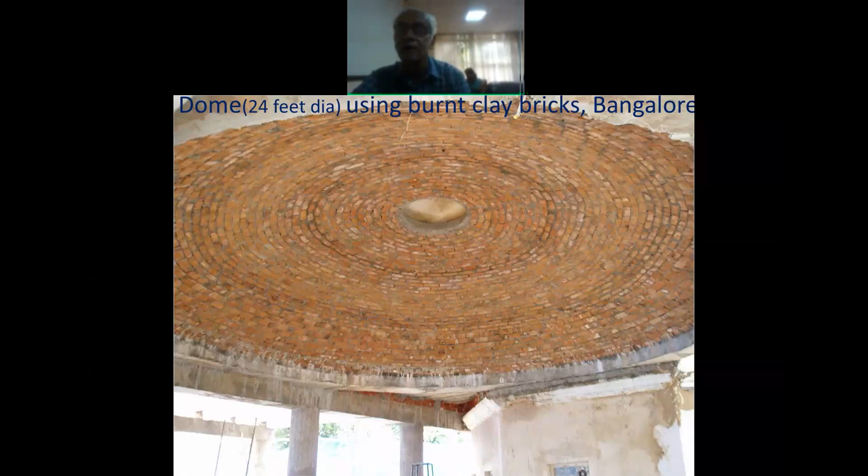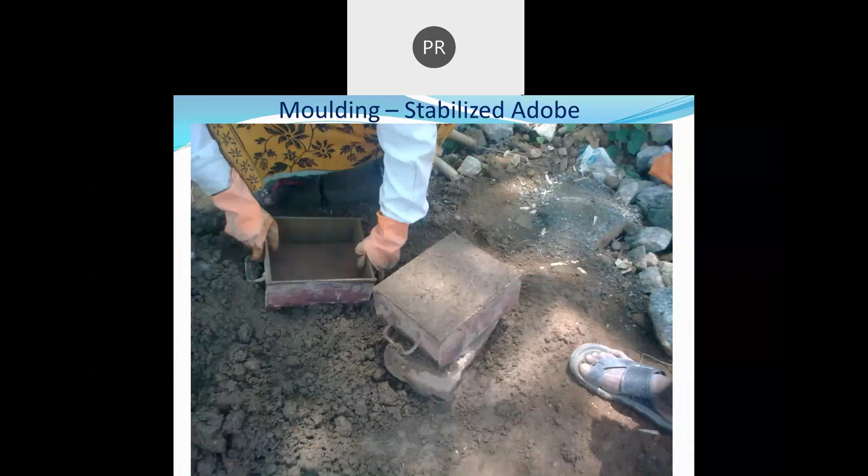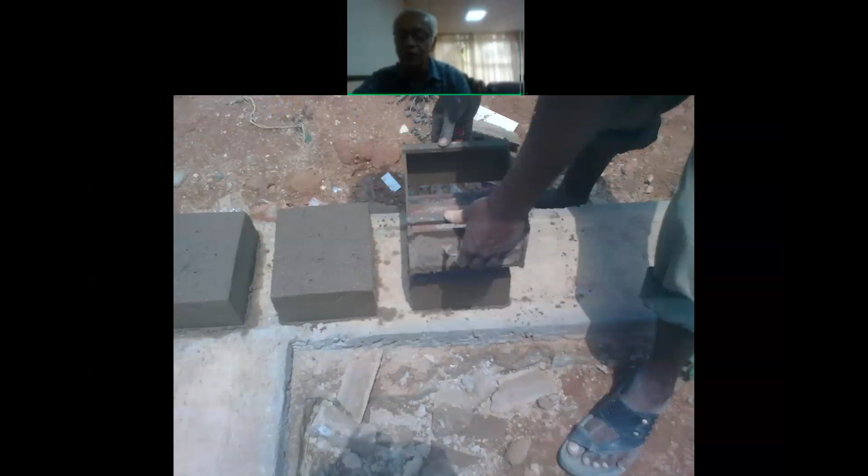Keep the block on the ground and then try to remove the mold. The top plate is still there on the block, and it's further removed subsequently. This is a very simple innovation, and we found it very effective to improve the shape of the block.

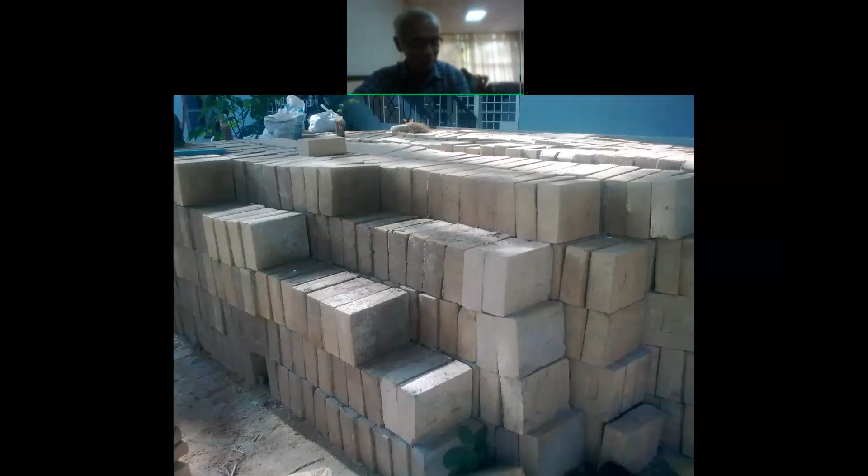These are blocks stacked, stabilized adobe blocks. There's a variety of blocks you can make with stabilized adobe. Here is a corner rounding, and this one is for a pillar slab. So all kinds of things can be made.

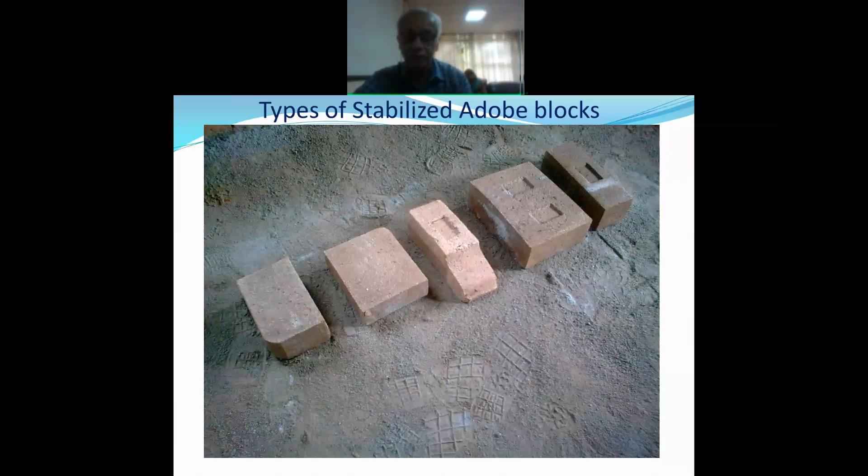This completes the dissemination activity which Yogananda has done. This dissemination activity includes training programs. For instance, on the 25th of this month, there is a 1-day exposure program in Mrinmai, where we will show hands-on exercises on how to make different types of blocks, rammed earth, stabilized adobe. Walls are not there; only mud construction will be demonstrated. It's a 1-day program. We also conduct 3-day programs under Gram Vidya, where both lectures and hands-on work are included.

So this needs to be sending the ideas all over the country. In fact, the Gunashila group is constantly consulting Dr. Yogananda and me. And when the Nalanda universities wanted to build their new buildings using mud blocks, we provided the information on how to stabilize the walls.